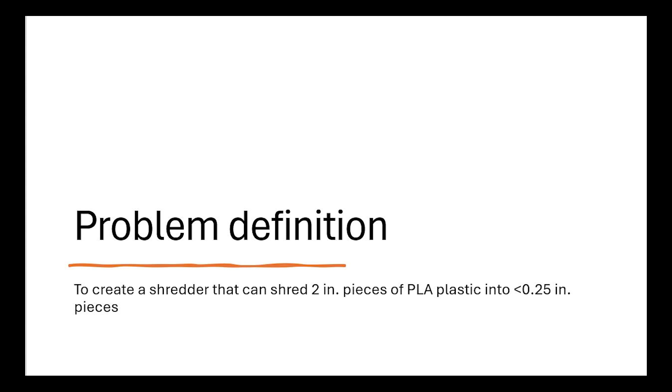Hey guys, so our problem definition is to create a shredder that can shred 2-inch pieces of PLA plastic waste into less than quarter-inch shreds.

So as you can see, we got our full design of the shredder right here. We got the e-stop that turns the motor on and off. The motor connects to a coupling system that goes into the gearbox. The gear reducer converts our high speed into high torque, which is something we value in our shredder design.

And then there's another shaft exiting the gearbox that connects to the shredder, which has teeth attached to it, and that's the actual shredding mechanism that you see. And then everything is mounted on the base plate.

So our main objectives were to be efficient, safe, fully automated, be able to run continuously until someone turned it off. It's got to have structural integrity. Got to make sure we have a valid factor of safety, just so everything that made up our assembly and our shredder wouldn't fail under the applied load of the plastic. It's got to be portable and easy to store.

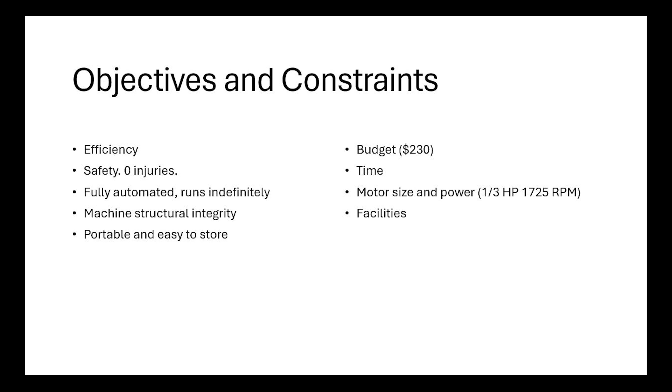And as far as constraints go, we had a budget, we had time we had to balance inside and outside of class, make sure everyone had a schedule that we could work around. The motor was given to us. And lastly, facilities was a constraint because we had to make sure that the way we wanted to make the shredder, we could actually make it at Mines with everything that Mines has to offer.

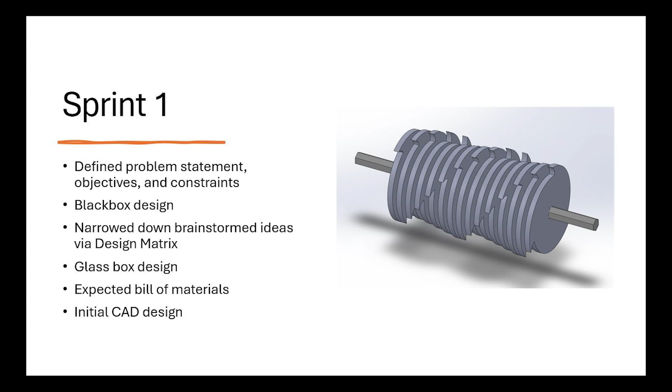So in Sprint 1, we defined a problem statement, objectives and constraints, made a black box design, narrowed down ideas with a design matrix that everyone had pulled in together, made a glass box design, expected bill of materials, and initial CAD design that you can see on the right. Obviously, our final project changed a lot from the initial CAD design. We're going to talk more about that process as we go along.

We calculated the gear reduction ratio that we would be needing for this project and tried to look for a gearbox that had that ratio. We submitted our first parts order form, and we updated the CAD model, as you can see on the right.

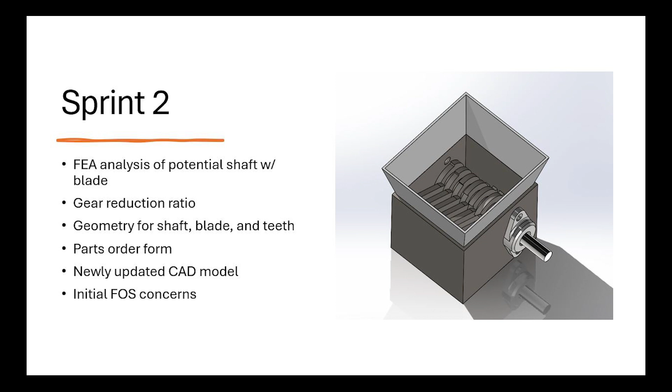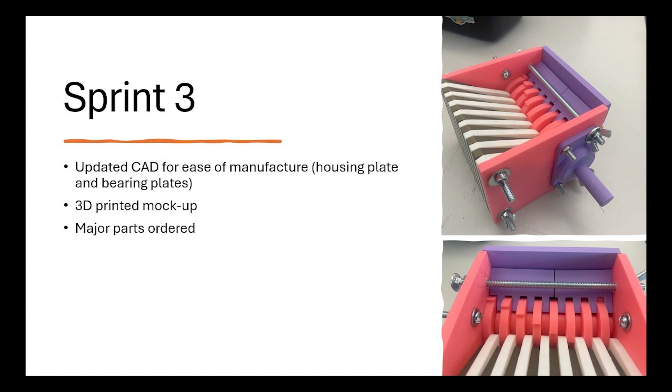So the biggest highlight of Sprint 3 is that we created a 3D printed mock-up. This is the first tangible model of our shredder. We ordered our major parts, and we updated the CAD models for ease of manufacturing.

So Sprint 4 is probably the hardest for our group because we fell a little bit behind schedule, but we were able to plasma cut the entire steel plate into all the components we needed. We welded the housing plates together, machined the bearing housing plates, and assembled everything into the shredder. We just weren't able to connect the shredder to the motor and actually see it running yet, which we had expected in this sprint.

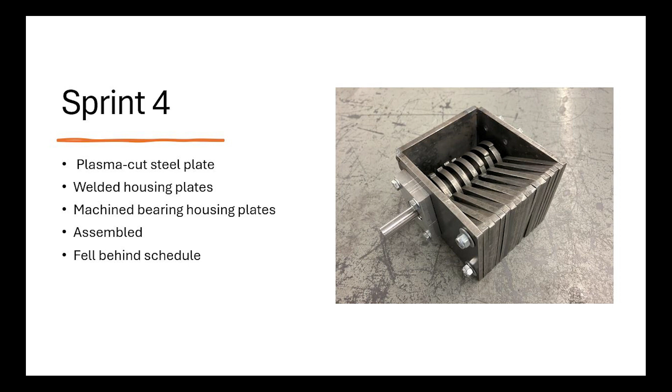So in Sprint 5, we were able to mount everything onto the base plate and orient everything so that it would flow best with our system. And we were able to conduct our first test. So we put plastic in the shredder and ran it, and nothing actually shredded.

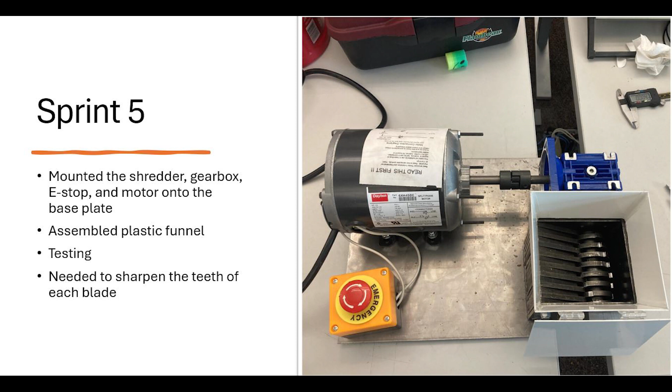We discovered that the teeth on our blades were not sharp enough. So we took every blade off and we sharpened each tooth of each blade until we thought it was sharp enough to cut through the plastic. So we ran another test, and the results from those tests are in the videos exactly following this.

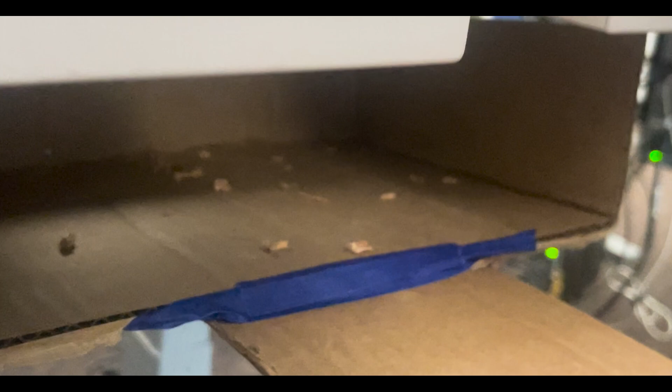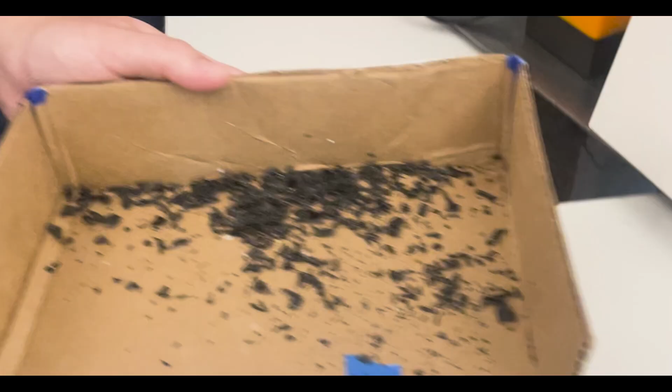So if our group were to do this again, we would design the blades to have a larger underbite and be sharper in the first place, so we wouldn't have to make them sharper again. We'd manufacture the tooth plate out of something metal that had more structural integrity, and we would manufacture the funnel to be metal too, just for a better aesthetic.

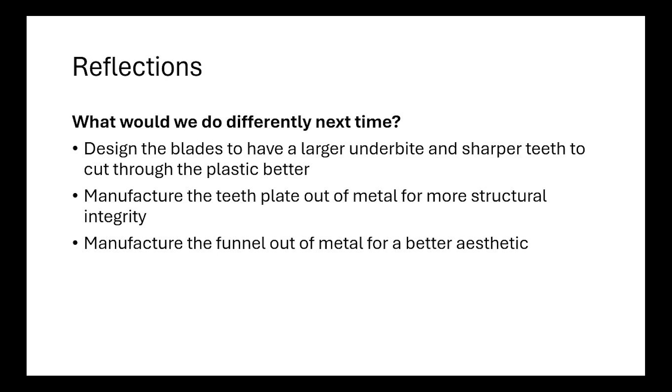So everyone in our group learned a lot about time management from this project, ordering parts efficiently in a timely manner, having the foresight to understand that a project like this has lead times with all these components that you're ordering and having to assemble and create. And those are just important takeaways that we'll be bringing into industry once we graduate.